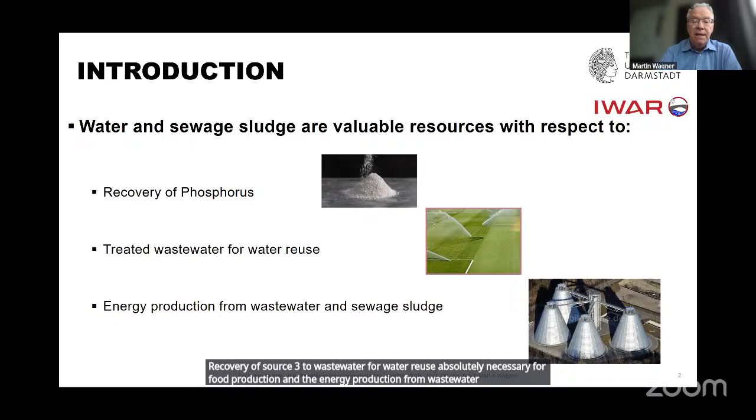What we see here is that water and sewage sludge are valuable resources with respect to recovery of phosphorus, treated wastewater for water reuse which is absolutely necessary for food production, and energy production from wastewater and sewage sludge. Starting with phosphorus recovery, I will keep this part short because my colleagues from Sweden will give more detail.

So I ask the question, why do we need phosphorus recovery from wastewater and sewage sludge? It's an essential nutrient for the whole food production worldwide. Second, we have to reduce dependence on imported phosphorus and increase the supply. And last, very important, is climate protection and resource conservation.

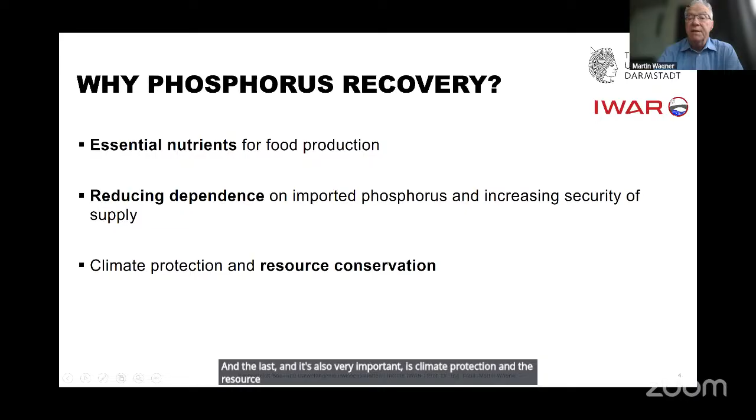We have a lot of phosphorus recovery processes. Precipitation from slurry water, we call it the struvite process. What is the product from this process? It's a very high quality, slow release fertilizer which we can use in agriculture very fast.

A wet chemical process, we call it digestion of the sludge or the ash of the sludge after incineration. The product is a purified phosphoric acid or liquid phosphates, which we can use in the fertilizer industry. The thermochemical processes from the sludge incineration ash produce a chloride-based phosphorus fertilizer.

And last but not least, the pyrolysis. The product is a mineral-rich coal pellet, which can be used directly as a soil improver or fertilizer in agriculture.

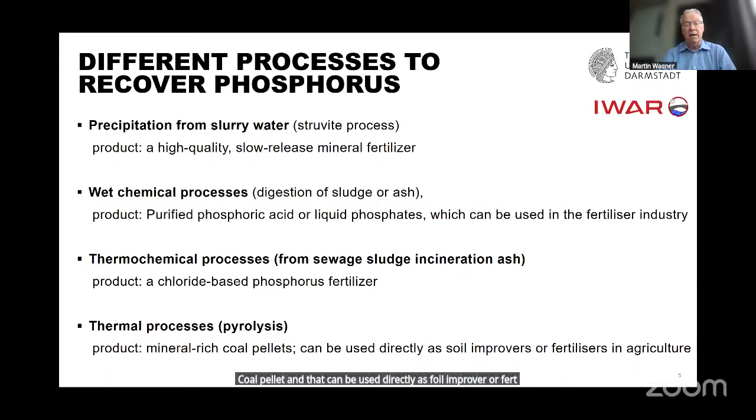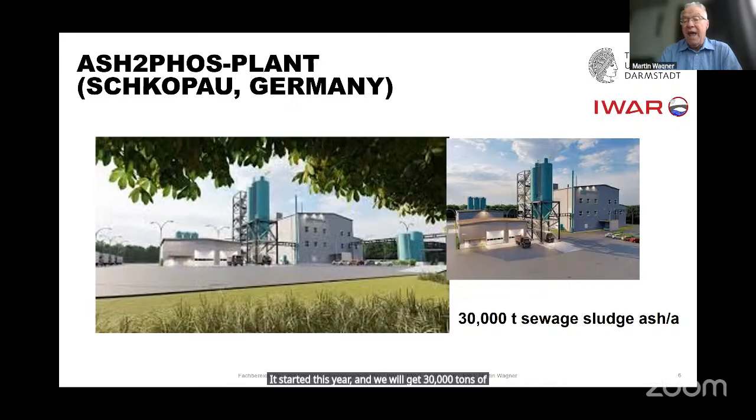And what you see here is a plant in Schkopau, Germany. It started this year, and we will get 30,000 tons of sewage sludge ash per year to produce fertilizer.

Now I skip to water reuse. Why do we need water reuse? When we look at this slide, population growth: in 2021 we had around 8 billion people in our world, and we expect nearly 11 billion by 2100. And we need this water for food production.

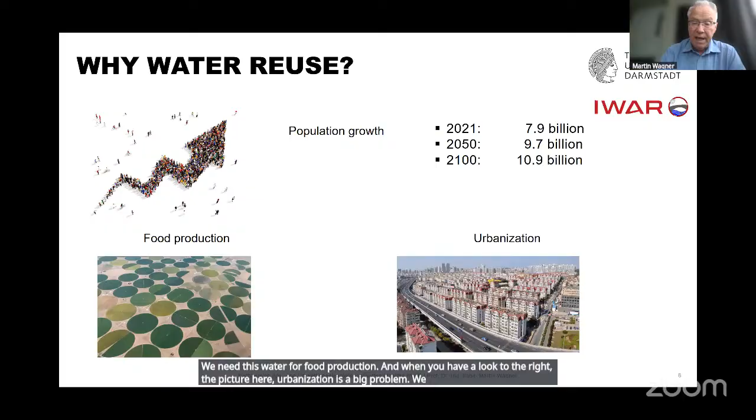And when you look at the right picture here, urbanization is a big problem. We need more and more water in our big cities.

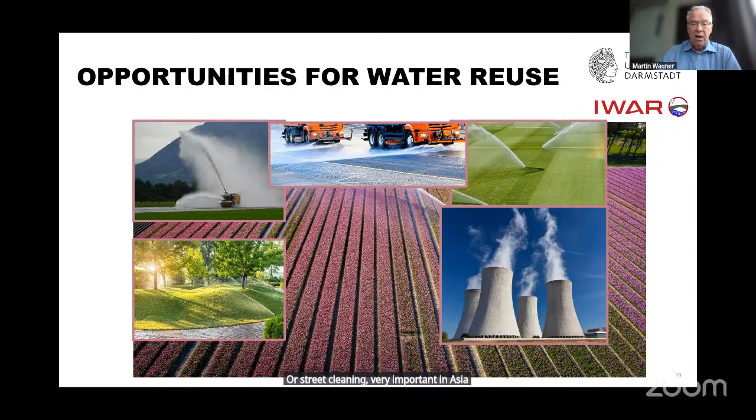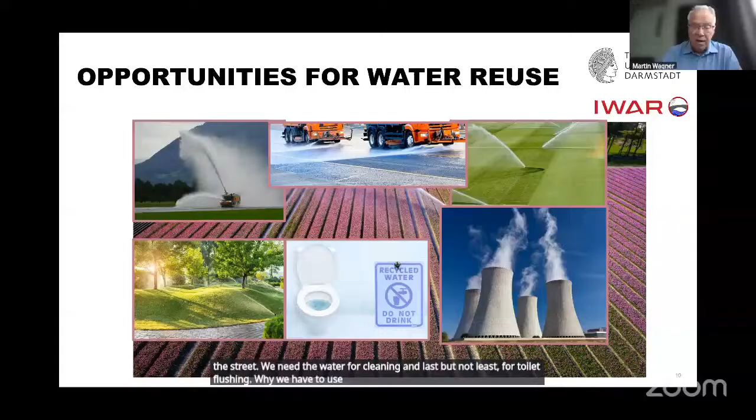What opportunities do we have for water reuse? What you see here is agriculture, golf parks or sport parks, firefighting, industry cooling towers, or street cleaning, very important in Asia where we have a lot of problems with the streets, and we need water for cleaning. Last but not least, toilet flushing. Why do we have to use drinking water for toilet flushing? There are other solutions.

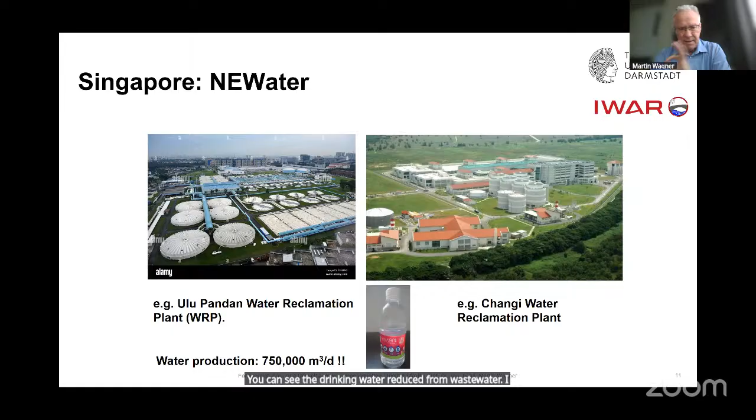Changi is near the international airport of Singapore. And at the bottom of the slide, you can see drinking water produced from wastewater. I drink it, and it's very good water coming from wastewater.

Orange County in California, one of the biggest installations worldwide for reuse of water: 450,000 cubic meters per day, enough water to meet the needs of 1 million people. And you see the pipes — when the pipes are purple in color, that means it's reused water.

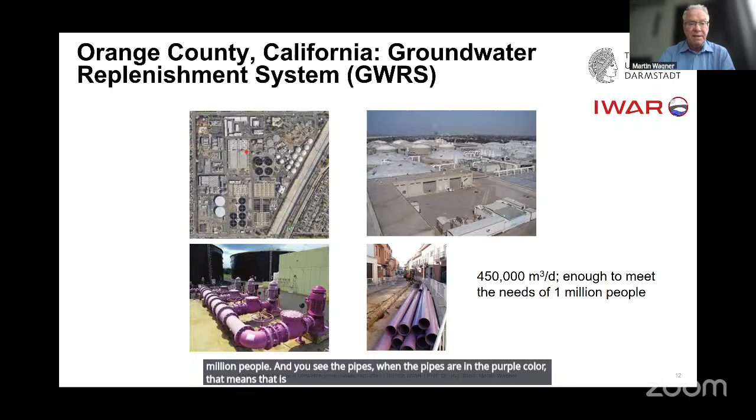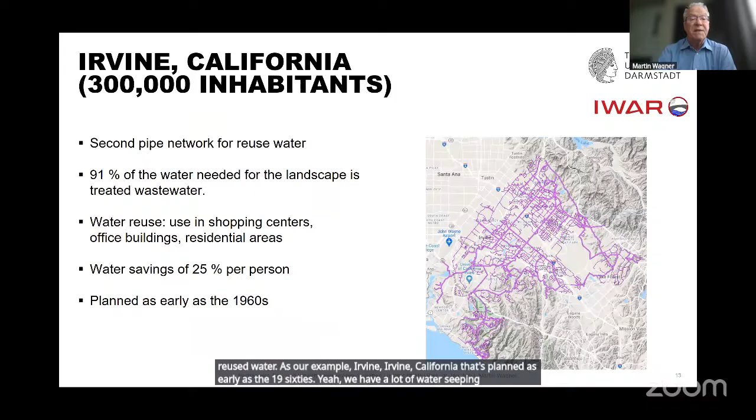Another example, Irvine, California, planned as early as the 1960s. We have a lot of water saving, 25% per person, and we don't need it as drinking water.

And that is in San Diego, also in California. What we see here is a water filling station — you see the purple color here. The residents of San Diego can obtain recycled water by coming by car and filling up the whole car, let's say, with reused water. That's very good to do.

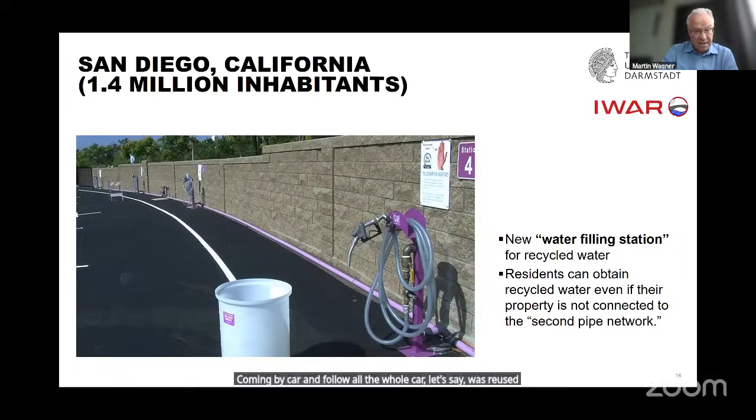I have built this resource recovery center in Qingdao in China. It was a pilot plant, but the pilot plant is good for 12,500 people.

We sample the water as gray water from bath tubs and showers, and also black water from kitchen and toilet. You see here the building, 70 by 70 meters, and we use 100% of the water as reuse water for street irrigation and street cleaning, and also irrigation. Very important, there's no discharge into a river.

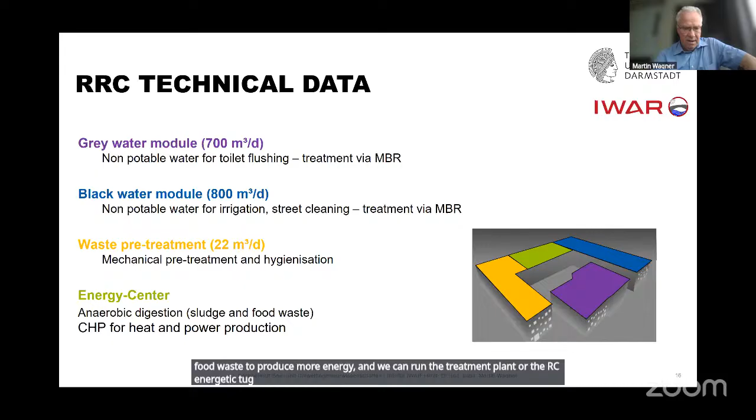So there are different modules, and you see around about 800 cubic meters per day, black water, gray water. We add food waste to produce more energy, and we can run the treatment plant or the RRC energy autarkic. That is really realized, and you see here on the left-hand side the inlet of the resource recovery center, and the inside. I asked you the question, is that a wastewater treatment plant, stinky and so on?

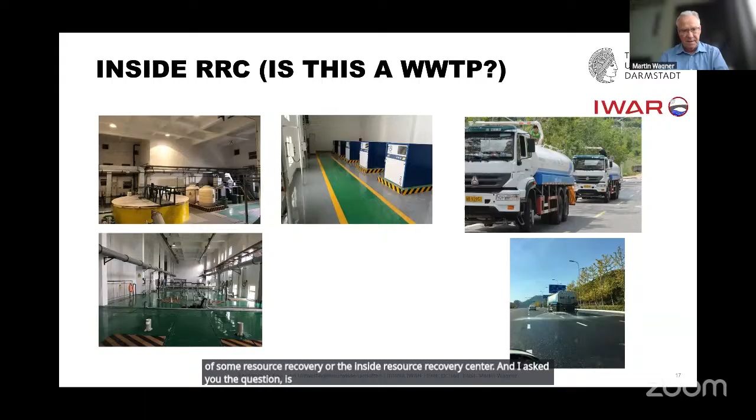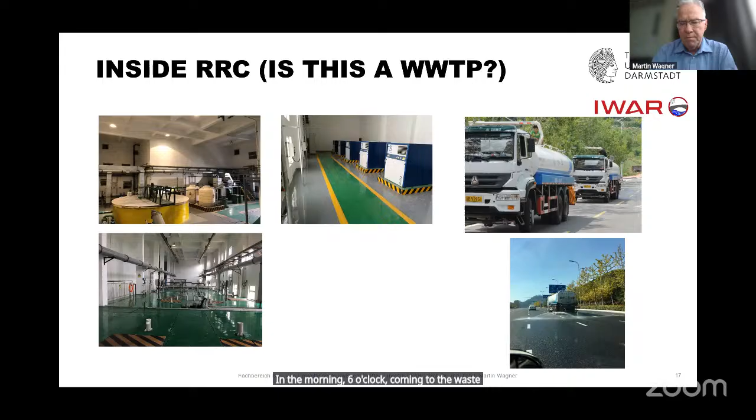On the right-hand side, the trucks in the morning, 6 o'clock, coming to the wastewater treatment plant or the RRC, and the tank, the water, and it's good for street cleaning.

Now I come to the very important point, energy production at wastewater treatment plants and how to reduce the energy consumption. Wastewater treatment plants are the biggest consumer of energy in every city worldwide. Here is why we need energy production from wastewater and sewage sludge.

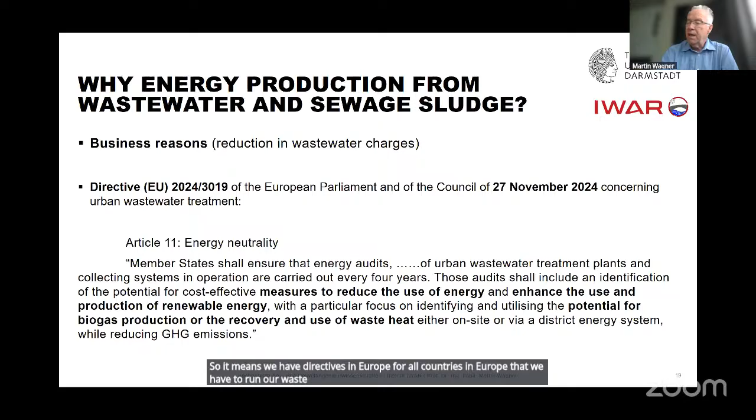We have the directive, the European directive of the European Parliament from 27th of November 2024. Here in Article 11, energy neutrality. That means we look at all the measures to reduce the use of energy and enhance the use and production of renewable energy, with a focus on the potential for biogas production or the recovery and use of waste heat. That means we have directives in Europe for all countries that we have to run our wastewater treatment plants in the future energy autarkic.

What you see here is the percentage of the plants and the specific electricity demand in kilowatt hours per capita per year. You see the 50% line, and you see different sizes of wastewater treatment plants. You see a lot of plants which produce or need more energy than is allowed.

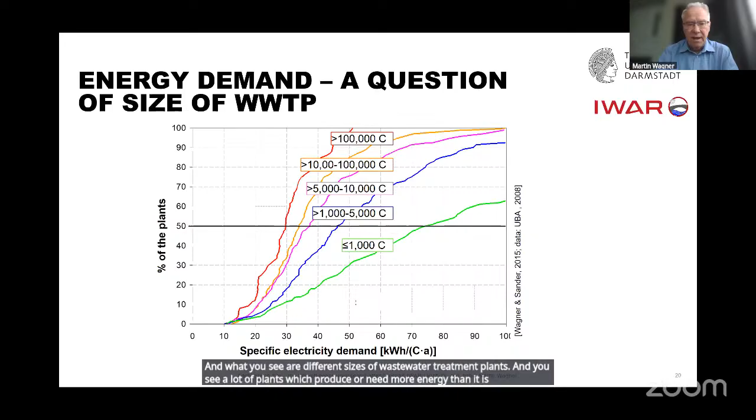Therefore, we have to recover energy from wastewater, and we can. Here's a scheme which looks very complicated, but isn't. On the left-hand side, you see the influent into the wastewater treatment plant. That is valid for the whole of Europe. We have around about 153 kilowatt hours per capita per year of energy in the wastewater.

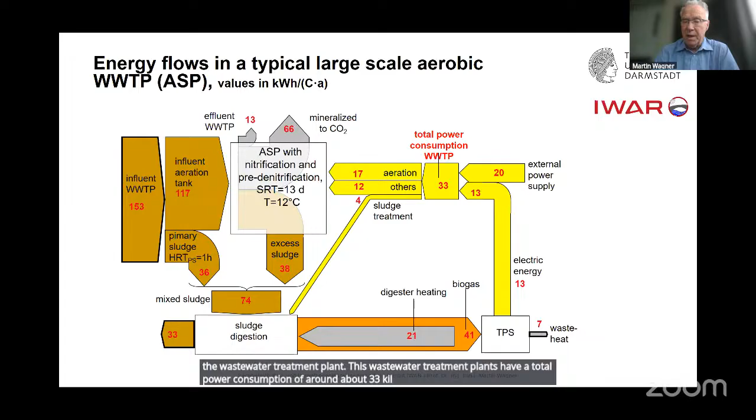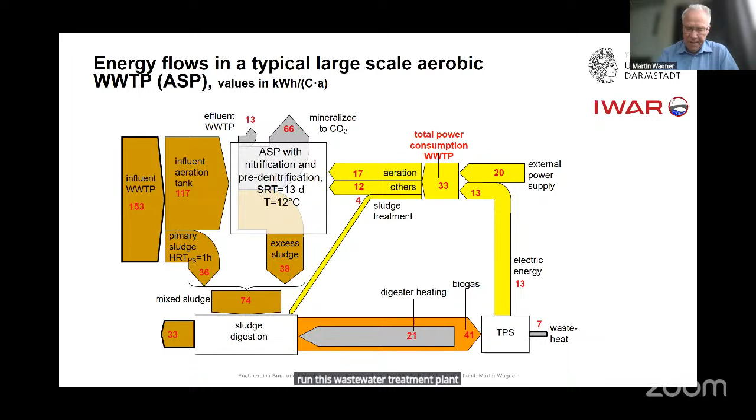After the treatment process and operation of a digester, we get round about 13 kilowatt hours per capita per year after the production of power and heat. The rest we need as external power supply to run the wastewater treatment plant. These plants have a total power consumption of around about 33 kilowatt hours per capita per year. That means we cannot run this wastewater treatment plant energy autarkic, but we have measures to do that.

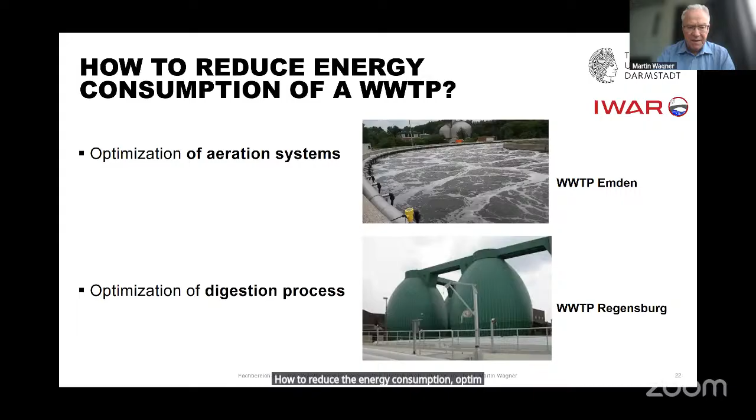I'll show you later on how to reduce the energy consumption: optimization of the aeration system, and optimization of the digester process.

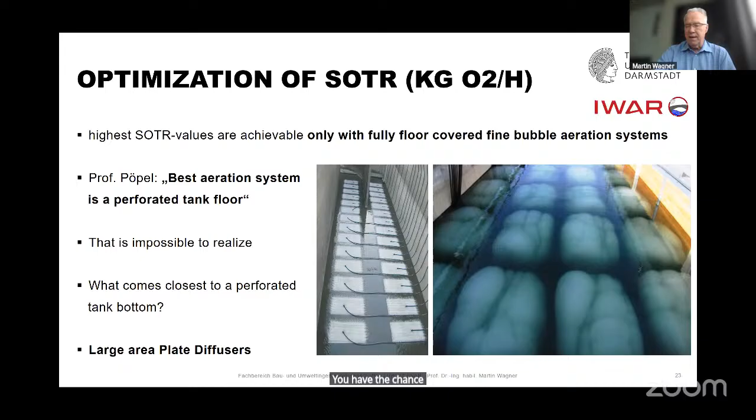What you see here is a very interesting wastewater treatment plant. My former professor said the best aeration system is a perforated tank floor. That's not possible, but we have technical solutions: large area plate diffusers, which you see in the pictures. When you install that, you have the chance to run a wastewater treatment plant very energy efficiently.

On the other side, you have to install blowers, and here you have to minimize the energy consumption of these blowers. A target value is a specific power of 30 to 35 watts per cubic meter per hour and bar of pressure.

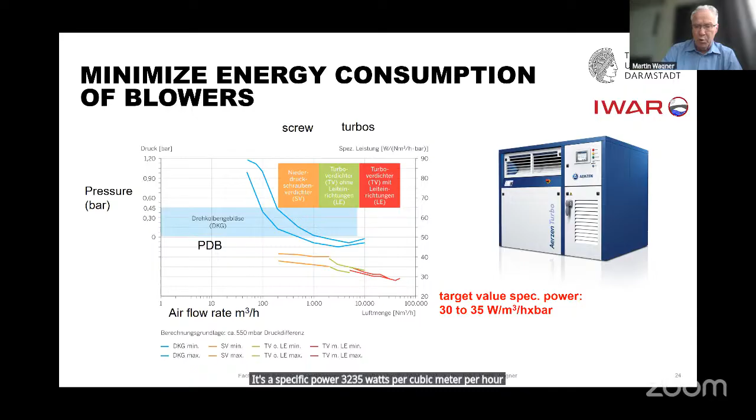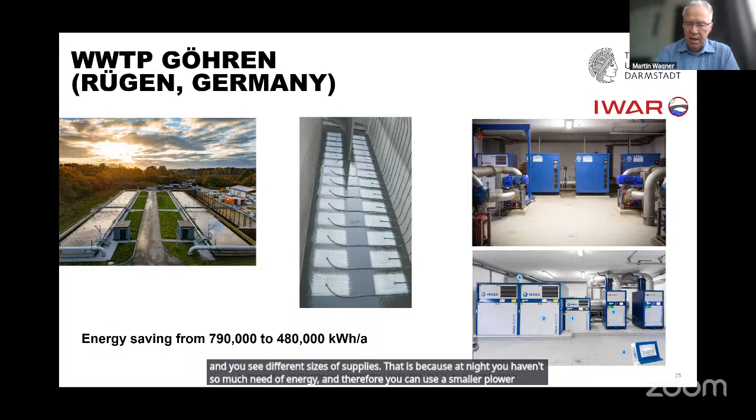Here's an example in Germany, on the island of Rügen, installation of the blowers, and you see different sizes of the blowers. That is because at night you don't have so much need of energy, and therefore you can use a smaller blower, which runs very effectively.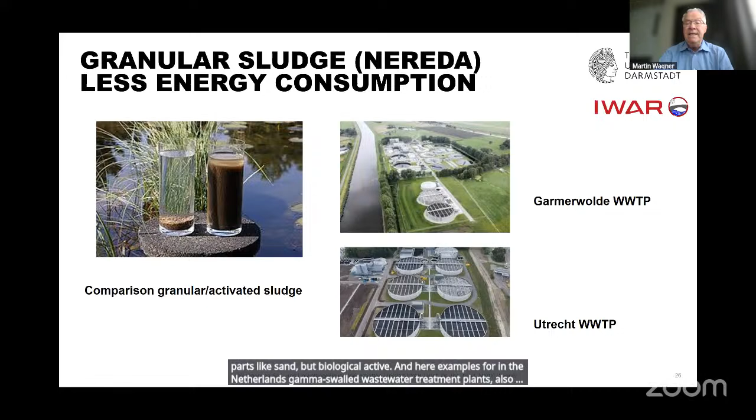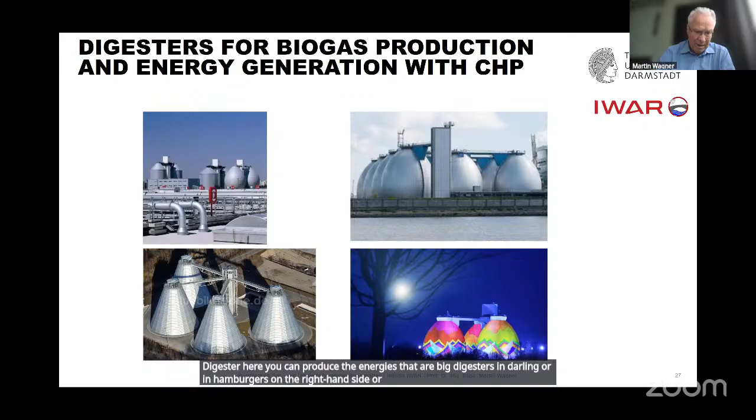Digesters, here you can produce the energy - there are big digesters in Berlin or in Hamburg on the right-hand side, or in the Ruhr area in Germany. So how can you get more biogas to produce power and heat? Add co-substrates like food waste, or, for example, oil from fruit preparation.

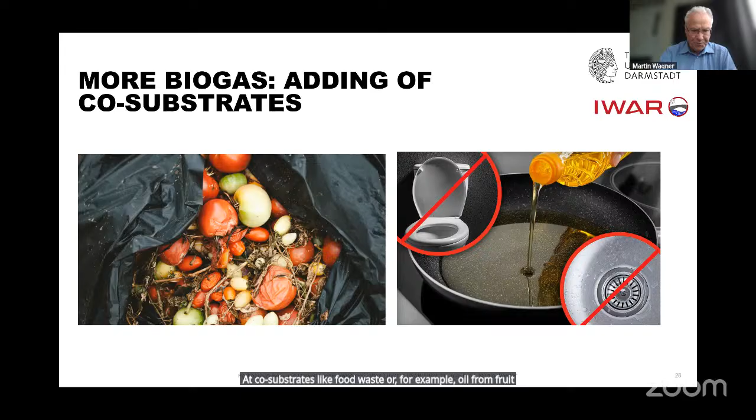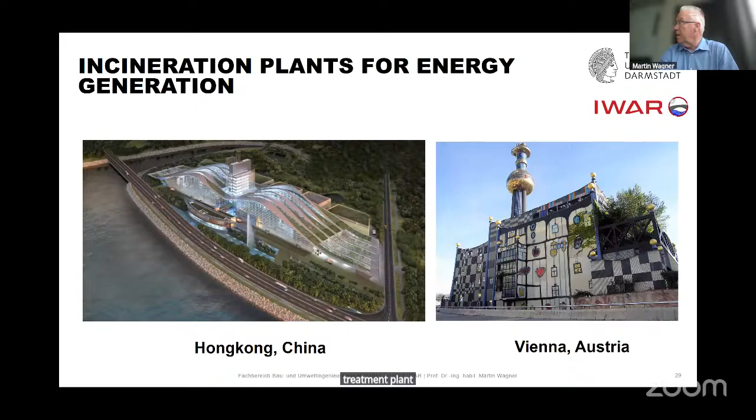Incineration plants also can deliver energy, especially heat, but when you have heat, you also can produce power. A big example is the plant in Hong Kong, China, and the Hundertwasser treatment plant in Vienna.

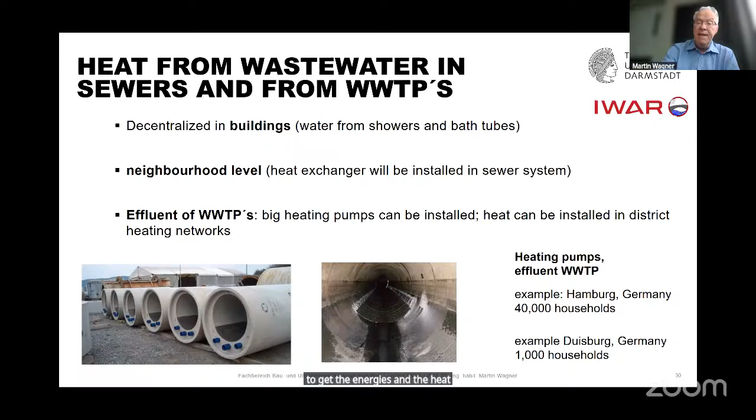You can also produce heat directly from wastewater in sewers and in the wastewater treatment plant itself, or decentralized in buildings from shower and bathtub water, at the neighborhood level using heat exchangers, or by installing big heat pumps in the effluent of a wastewater treatment plant. Examples are the wastewater treatment plants in Hamburg and Duisburg, Germany.

Artificial intelligence is also a big topic in running wastewater treatment plants. For example, digital twins of a wastewater treatment plant, so we can optimize the operation of wastewater treatment plants, and therefore also optimize energy reduction and recovery of phosphorus.

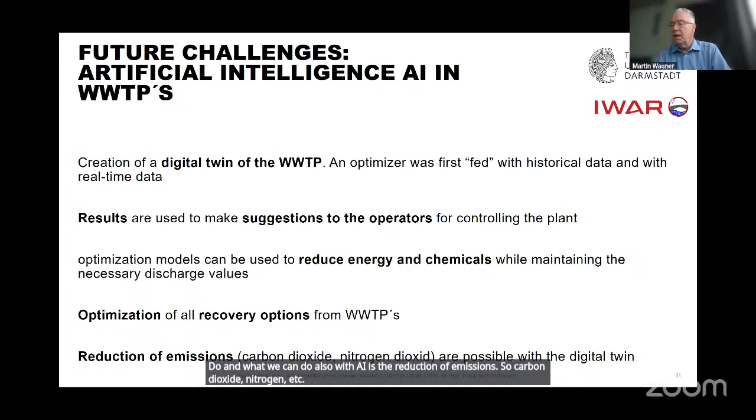And what we can also do with AI is the reduction of emissions, such as carbon dioxide and nitrogen dioxide. That is also possible with a digital twin.

What are future challenges? First of all, removal and degradation of microplastics from wastewater. You can also reuse some microplastic, and there's production of biopolymers, bio-based plastic from wastewater. Here we have specialized bacteria that use the acids in the wastewater as food, and they then produce polyhydroxyalkanoates, PHA.

That is a biodegradable plastic with thermoplastic properties, so it is a possibility to replace conventional petroleum-based plastic in a lot of applications.

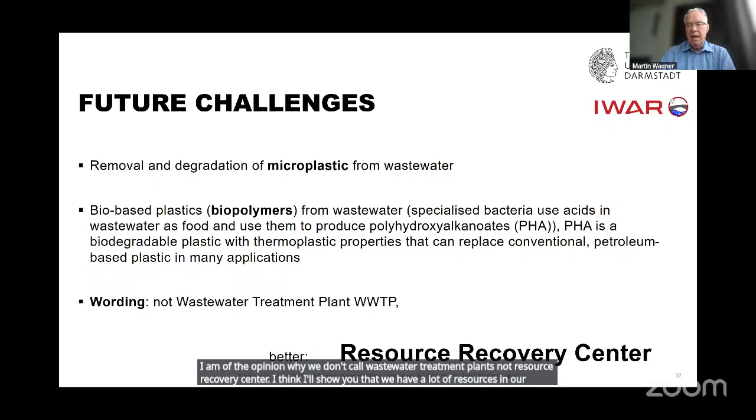Last but not least, for me it's the wording, wastewater treatment plants. It looks dirty, it's not good. I am of the opinion, why don't we call wastewater treatment plants resource recovery centers instead? I think I've shown you that we have a lot of resources in our wastewater, and I am nearly at the end of my presentation.

Summary and conclusions: wastewater is a valuable resource, you just have to use it. What are resources? Phosphorus, reuse water, energy, meaning power and heat. We have a lot of realized projects worldwide in practice, on a practical scale.

We have some future challenges: artificial intelligence, and also the production of biopolymers. My aspect is resource recovery centers instead of wastewater treatment plants. I think that is important because of the wording.

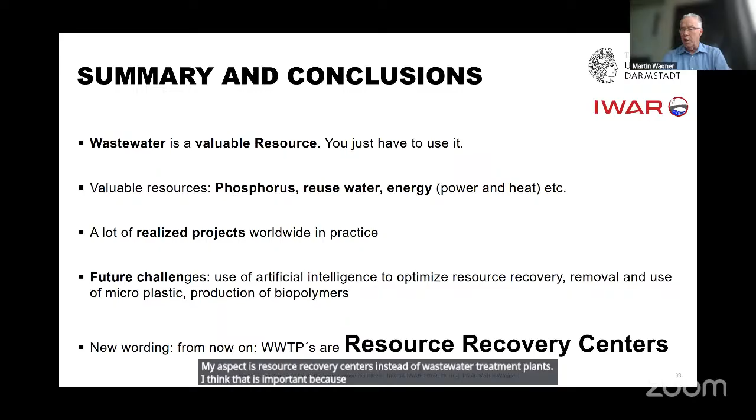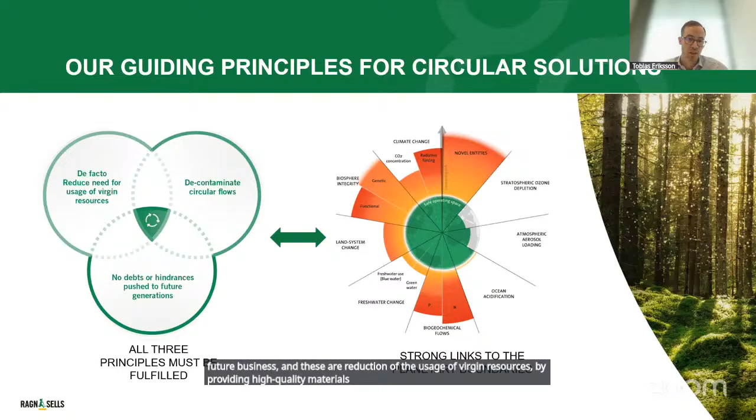We have established 3 fundamental principles to reform our future business: reduction of the usage of virgin resources by providing high quality materials from urban flows; decontamination of material flows, regardless of their final use; and ensuring a livable planet where future generations can thrive.

These principles are based on the scientific understanding of the planetary boundaries and the flow of materials through society. Today, humanity is exceeding 6 out of these 9 boundaries, with increasing pressure on all of them except one. But by creating a circular loop that includes proper decontamination, we believe we can counteract the violation of any of these 9 boundaries.

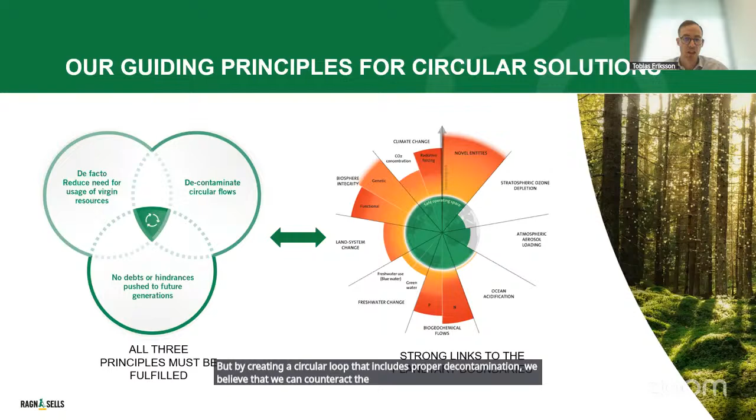We really believe that if we are serious about transitioning towards a sustainable society, we need to use the materials we have over and over again. To do this, we have developed technologies for the recovery of phosphorus and nitrogen from sewage sludge and wastewater. On this slide, you can see 3 of our technologies.

Decontamination is a key element of the circular economy, as there are certain substances and materials that should not be circulated in society. Landfills therefore play an important role in detoxification and work as secure storage for these substances. We are also involved in developing solutions to collect and store PFAS, but that is a topic for another time. Today I will focus on nutrients and nutrient recovery.

Even though I will mainly focus on phosphorus today, I feel it's important to also mention nitrogen, because the paradox in the current system is quite striking.

Today, wastewater treatment plants are tasked to do bad things less bad. So wastewater treatment plants remove nitrogen to protect water bodies. But in doing so, they often convert nitrogen into nitrogen gas and release it back into the atmosphere.

At the same time, nitrogen fertilizers are produced through the Haber-Bosch process, which is highly energy intensive and heavily dependent on fossil gas. So this means that we are essentially destroying a valuable resource in one part of the system only to recreate it again elsewhere at a very high climate cost, because the production of nitrogen fertilizer today accounts for emissions equivalent to over 1 billion tons of CO2 per year.

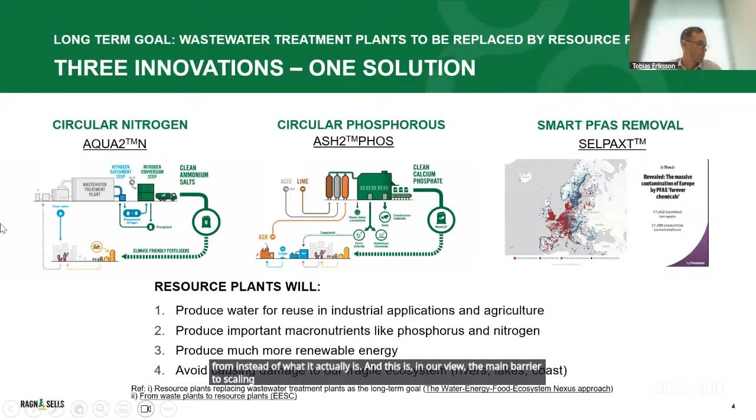To give a final example of important circular solutions, I want to mention aquaculture, because it's already a large and growing sector in Europe, generating around 4.6 billion in annual revenue, and much more if you include Norway, Scotland, and Iceland. At the same time, the EU is highly dependent on imports of fish and seafood, with imports covering about 62% of consumption, and fish farming is one of the key solutions for feeding a growing global population.

However, the associated waste streams have so far been more of a challenge than an opportunity. In most cases, fish sludge sinks through the net pens of the fish farms and is released into the ocean, contributing to eutrophication. But by introducing circular solutions, this could fundamentally change — it could generate up to 30 billion in direct revenues, while also driving investments, creating jobs, and reducing the EU's dependency on imports.

Ragn-Sells is actively working to enable this transition. In our Havbruk project in Norway, which you can see here on the slide, the sludge is captured using a cap beneath the net pen and then transported to shore, first used for biogas production, and the remaining nutrients are then recovered using Easy Mining technologies.

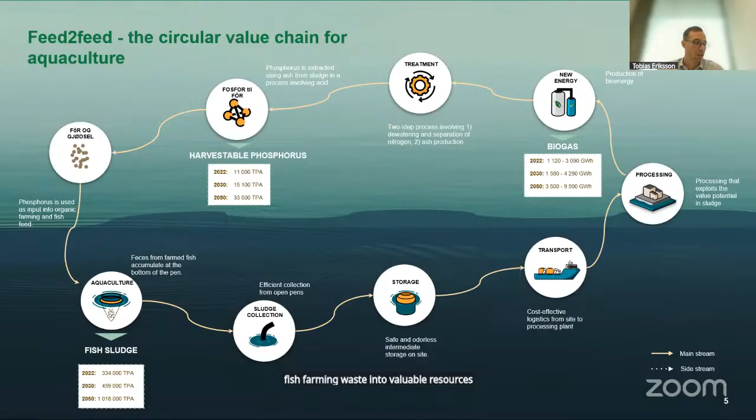We are now participating in an EU-funded Horizon Europe project called Aquaphoenix, which aims at making aquaculture more sustainable by turning fish farming waste into valuable resources instead of an environmental burden. The project brings together researchers, industry partners, and fish farmers to better understand the environmental impact of fish sludge and develop circular solutions. We contribute with our Aqua2N technology to recover nitrogen from the liquid fraction of aquaculture waste, and adapt our Ash2Phos technology to extract phosphorus from the ash after sludge incineration. Technical trials are expected to begin soon, likely from mid-2026.

From a purely technical perspective, we know how to collect this sludge, treat it, and convert it into fertilizers or feed input. If circular solutions are implemented at scale, the potential is significant — aquaculture production could increase substantially, and circular solutions could add tens of billions of euros in economic value, while reducing import dependency. But in reality, the potential is not realized, because today there is in practice a total ban on using recovered nutrients from fish sludge for agriculture or feed.

So again, we see the same kind of structural issue as with our sewage sludge and nitrogen solution: it's not about the lack of technology, it's about regulatory definitions and market access. If fish sludge were recognized either as a byproduct or as an approved input material in EU fertilizer rules, this would unlock an entire circular value chain linking aquaculture, wastewater, fertilizer, and food production.